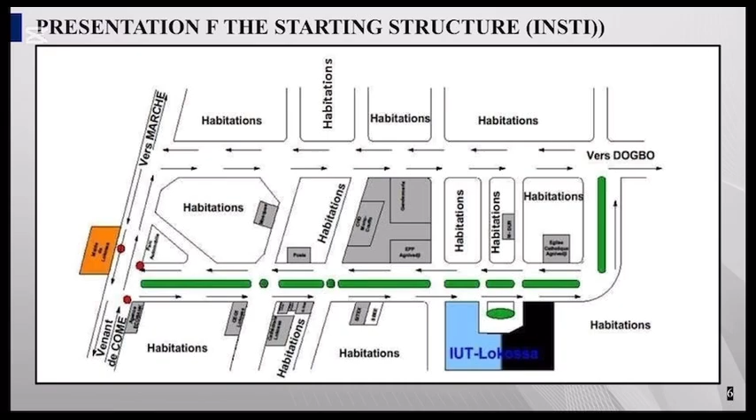Let's move on to part 1, which is the presentation of the structures. Initial structure. The Institut National Supérieur de Technologie Industrielle INSTI de Lokossa is an establishment founded in 2001 with 5 departments as follows. Geographical localization is as follows. INSTI is located in Lokossa.

As for the company, Portil BTP is an Ivorian company founded in 2012 and specializing in the construction of road infrastructure, road and various. Ladies and gentlemen, I'd now like to talk about my internship, but before I do, I'd like to briefly introduce the project. In order to facilitate road transport and reduce the risk of accident, the Beninese government has decided to develop and widen the RNIE 2 Missessinto-Allada section.

During my internship, I had to follow several geotechnical tests. Among the laboratory tests, we had to follow both white and black tests. The white tests include particle size analysis, sand equivalent, organic matter, modified Proctor test, and CBR test. The black tests include the viscosity test and the Marshall test. For in-situ tests, we had to follow the plate load test and the density test.

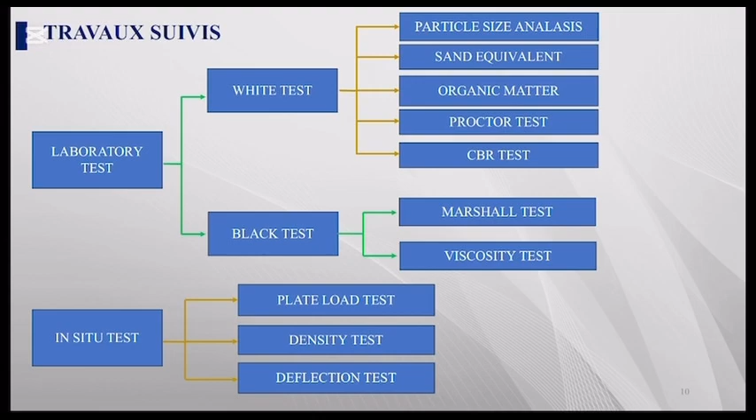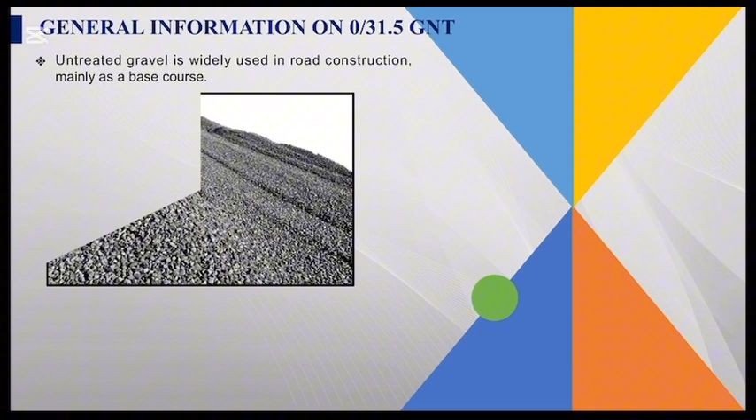In the rest of our presentation, we will mainly deal with tests related to the study of GNT 0/31.5. Dear Sir and Madam, we are now going to present the result of the formulation and application of GNT as a base course. Untreated gravel is widely used in road construction, mainly as a base course. The gravel used in this project comes from the gravel quarry in the Zou department.

So the grading curve for untreated gravel fits perfectly within the normative grading range, indicating good particle size distribution and adequate homogeneity. Furthermore, the modified Proctor test revealed a maximum dry density of 2.22 ton per cubic meter and an optimum water content of 5.5, which ensures optimum compaction for the material.

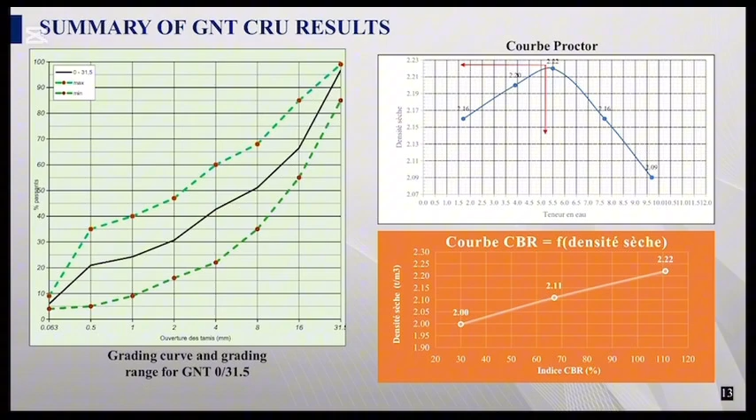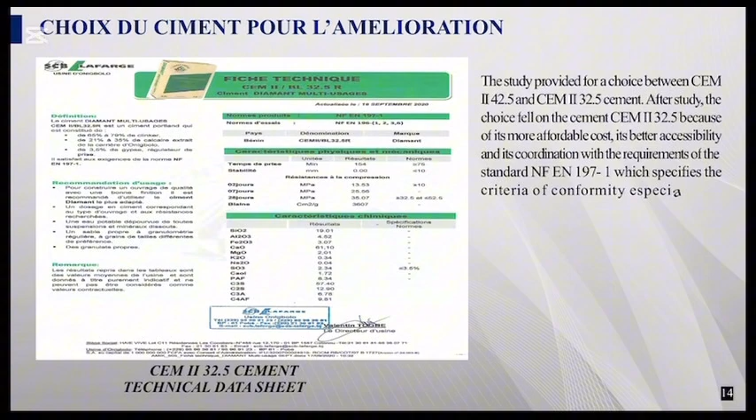However, the CBR of 67 corresponding to 95% of the OPM is not sufficient to meet the recommendation required for the project base course. The company therefore opted for an improvement with CEM II 32.5 hydraulic cement binder. Different cement percentages were proposed, including 1.5, 2, 2.5 and 3. In view of the results obtained at 7 days age, Portil BTP proposed to upgrade the GNT with

2.5% cement. The principle being to keep the material flexible, despite the fact that the material improved with 2.5% cement has a CBR of 208, more than 130. The choice of this dosage is justified by the fact that the other mechanical characteristics of the material give it flexible characteristics, while the dosage of

1.5% and 2.0% cement, leading respectively to 7 days compressive strength of 19.9 and 21 bar, are barely equal to or higher than the required minimum strength of 20 bar, which could lead to lower mechanical performance when the on-site hazards are taken into account: adjustment of spreader metering devices, gusts of wind.

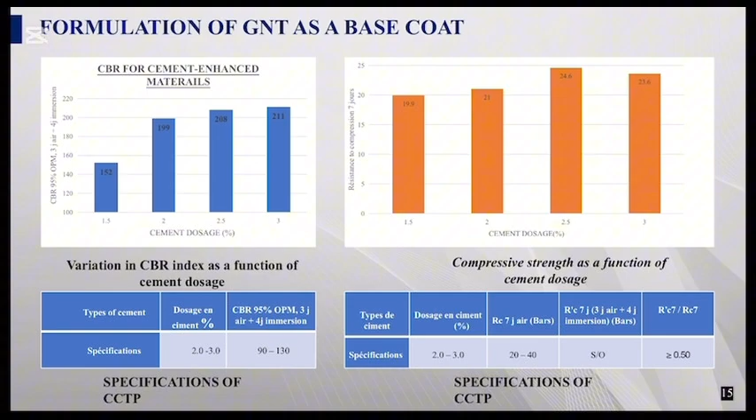The GNT is previously supplied, spread and preset in a 3.5 cm thick layer. If the spreader is not available, we proceed with marking out the selected mesh dimension, placing the cement packages in the well-marked meshes on the ground, cracking the cement packs with careful removal of the papers, and spreading the cement using manual scrapers. If the spreader is available, set up the spreader and spread the cement at a rate of 16.90 kg per square meter.

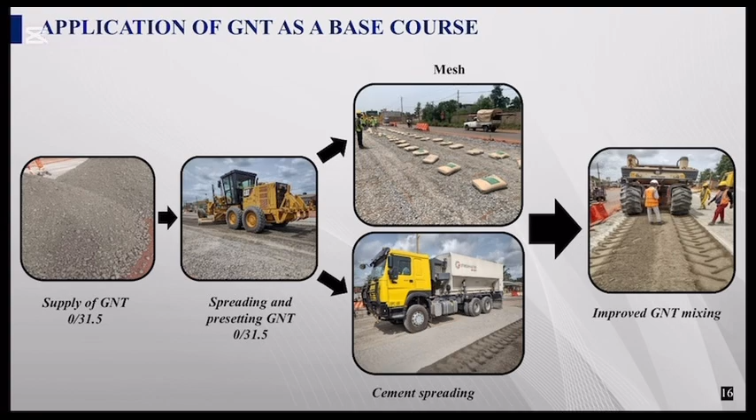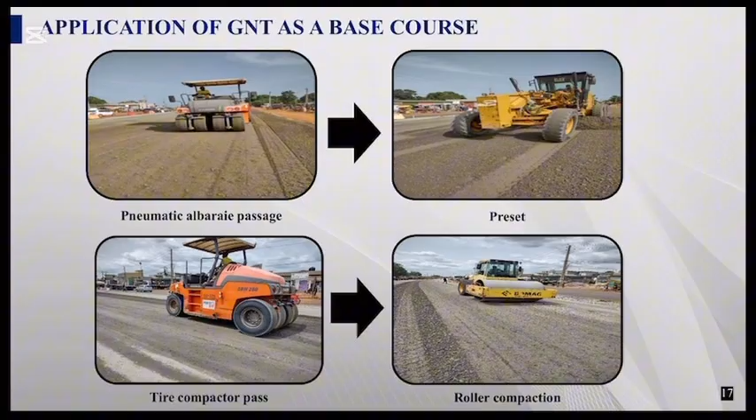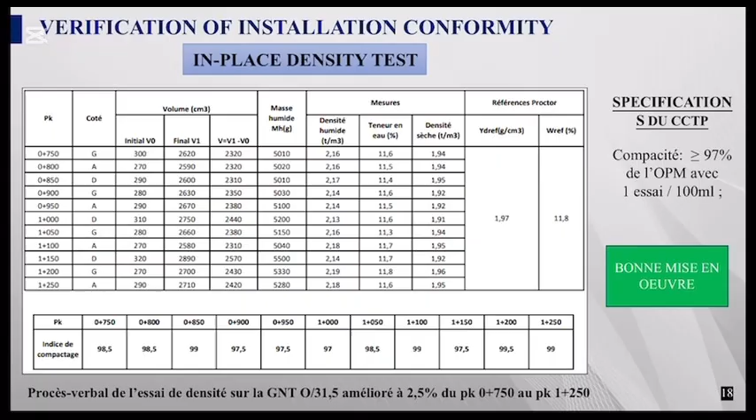After laying the GNT base course, the company carried out a verification test in the presence of the inspection team. The density test is an in-situ test to determine the dry density of the layer in order to assess its degree of compaction. The CCTP requirement for the in-situ density test is a compactness greater than 97% of the OPM. In our case, we have 100% of values above the 97% of OPM. This is therefore a good implementation.

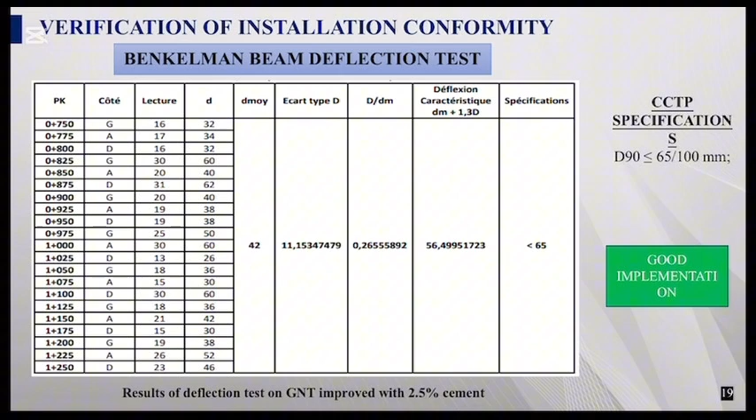The deflection test is an in-situ test used to measure the structural rigidity to resist a rolling load, to determine at each kilometer's profile the vertical displacement of the point on the surface generated by a rolling load on the ground. In our case, we found a characteristic deflection of 56, which is less than 65, which complies with the specification.

This training course on the Alada-Mississento Road reconstruction site was a very enriching learning experience and helped us understand that theory doesn't apply so easily on site, hence the need for practice at the end of the course.